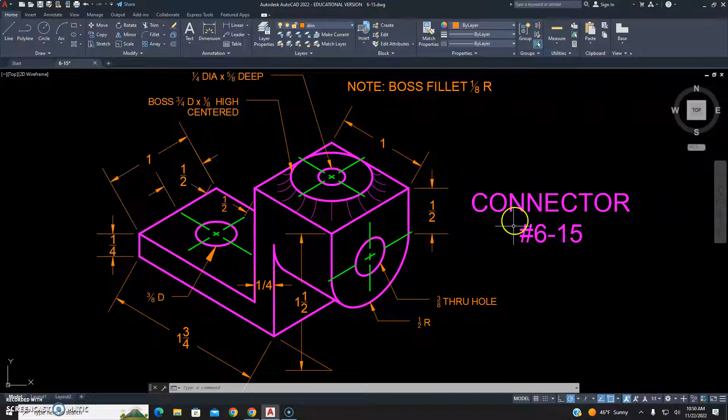So like I said, our front view is essentially going to be this view along this plane right here. So let's start with that. So we switch over to object. We said we have kind of an L shape that is 1 3/4 inch long by...

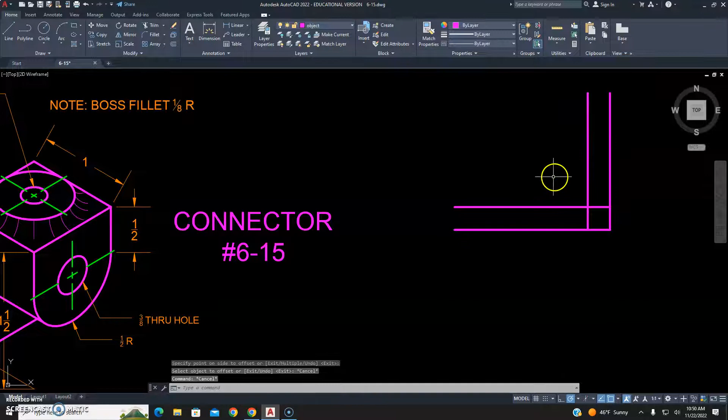1.5 tall. Now some of this line is going to have to go away eventually, but for now let's just get that L shape going. We said it was 1/4 inch thick. And we'll just connect up these lines here.

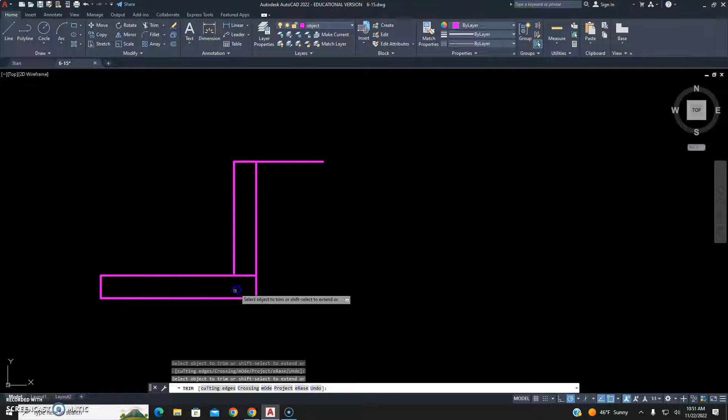And then what you could do to help yourself out here is draw this line 1 inch long—that's going to be the top. And then we'll come in and trim away these pieces. So here's our L. And again, we're not going to extend to the right past the end of this line because this completed is 1 inch. And some of this line right here is going to go away eventually, but we don't know what yet.

So next thing we need to lay out is our side profile of this letter D. This gets a little tricky because, from the side—if we remember—the side view of a cylinder is actually a rectangle. So there's no curvature in the view that we're going to look at here.

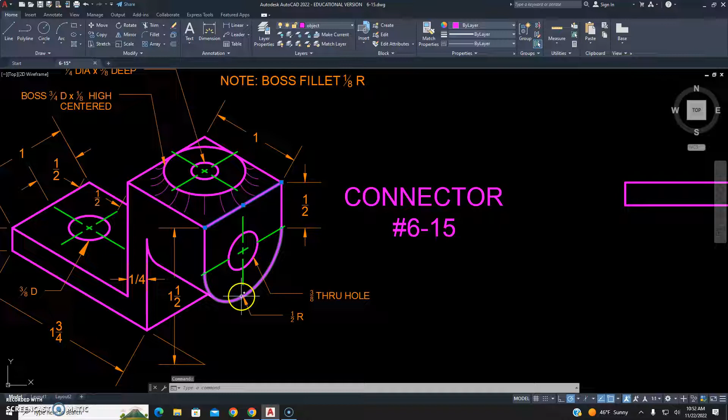So what we need to do is figure out the total height, and then figure out where things come into play. So here we've got a 1/2 inch radius that shares the same center point as this hole, so that means to get to the center of this is 1/2 inch from the bottom. And then if we go over here, we see a vertical measurement that's also 1/2 inch for the rectangular section, so from this edge to the bottom of our curve here is 1 inch.

So what we can do to make this happen is we're going to come down here 1 inch, and then come in and bring that into touch.

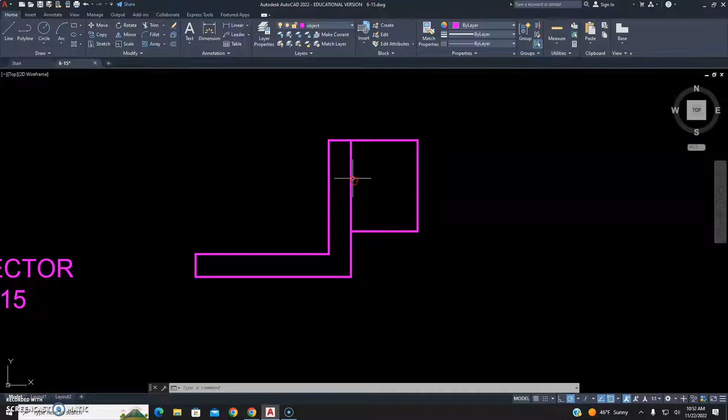Now, again, one thing we need to look at is go back and look at some of our original geometry. I can move my cursor along this flat face here and move it out onto our protrusion on the right without crossing a sharp edge. However, in our drawing currently, we do have that sharp edge. So we need to figure out where does this merge happen, and then where does it separate, because it actually separates when the front face starts to curve away.

So we need to find out exactly where this point is, that's exactly where our curve stops. Okay, so again we have a rectangular section up here. That's what's going to be coplanar with the side of this right here.

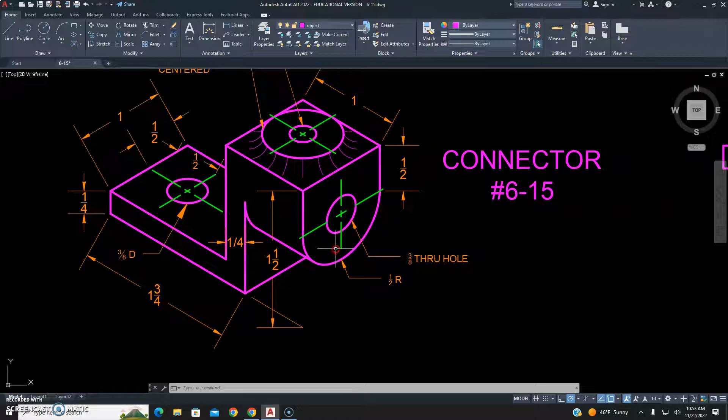And then the part that starts to sort of peel off is where the curve starts. So that's 1/2 inch down from the top. So if I offset down from the top 1/2 inch...

Okay, now I can either trim that or I could just shorten this line, doesn't really matter. And we'll delete that, and now the basic structure of this is essentially done.

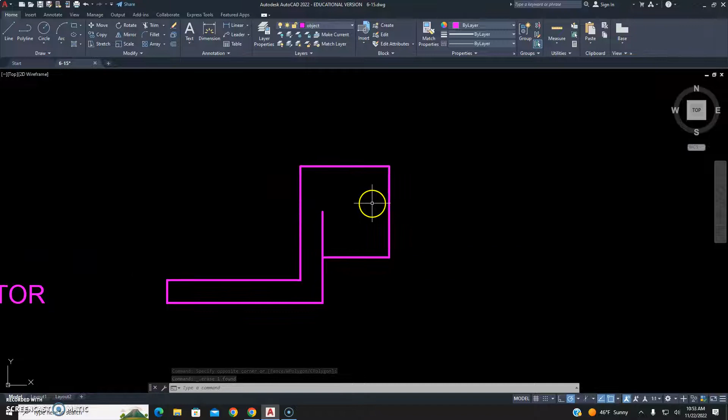Now we've got to add our boss, so we can offset that. Our boss fillet - our boss is 1/8 of an inch tall and 3/4 of an inch wide. So offset 1/8 of an inch.

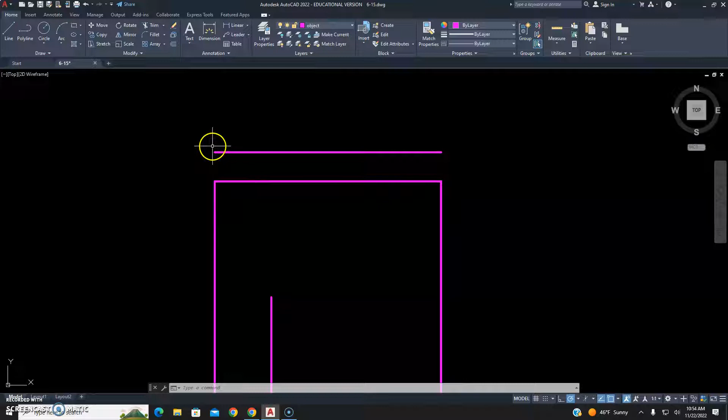Now there's two ways we can do this side profile of the boss. One is we could shrink this line down that's currently 1 inch long and turn it into a 3/4 inch line, and then add the fillet after the fact, because it has a fillet of 1/8 of an inch as well. Or if we realize we have 1 inch total in width here, and then we have a 3/4 inch flat surface, and then we're adding an 1/8 of an inch fillet to each side, which means we're going to have kind of this rounded curve.

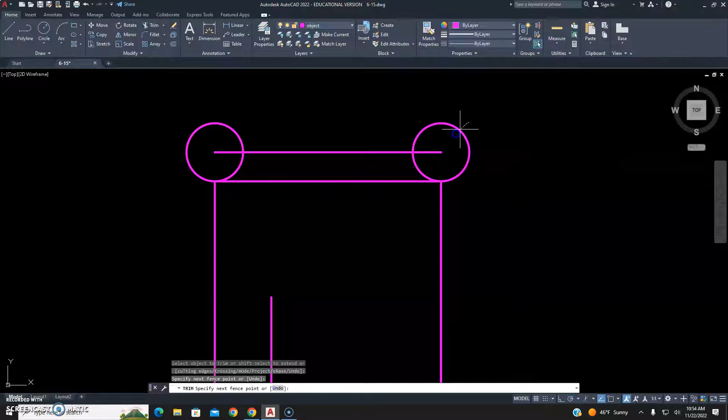It's going to come right to the edge. So a neat little trick is to just draw a circle here rather than use the fillet tool, like so, and then trim this up. Watch this: 1, 2, 3, and 4. And there we have 3/4 of an inch, our boss, plus our fillet, all set there.

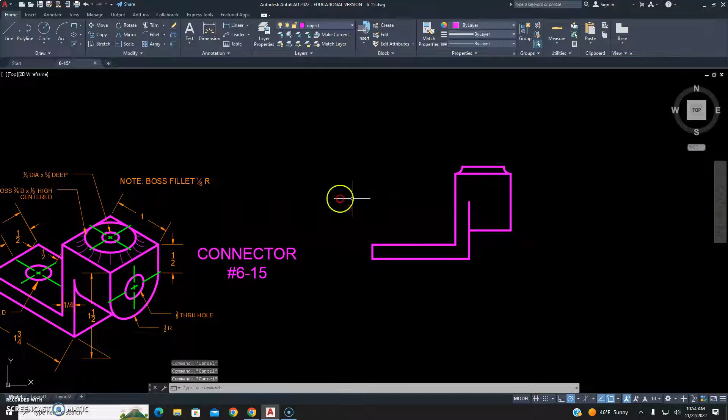So now essentially all of our visible lines are done in this view. Now we can start adding in our holes. On the back side, we have a hole that comes 1/2 inch from the left edge of our drawing, and it is 3/8 of an inch in diameter, and that 1/2 inch goes right to the center of the hole. So if we offset here 1/2 inch...

Okay, a few things we could do to lay this out. Number one, we could offset this 3/16 in either direction, or some people might appreciate this: draw a circle right there, hit D for diameter and type in 3/8. Then we can just use that as a temporary marker to bring in our hidden lines here.

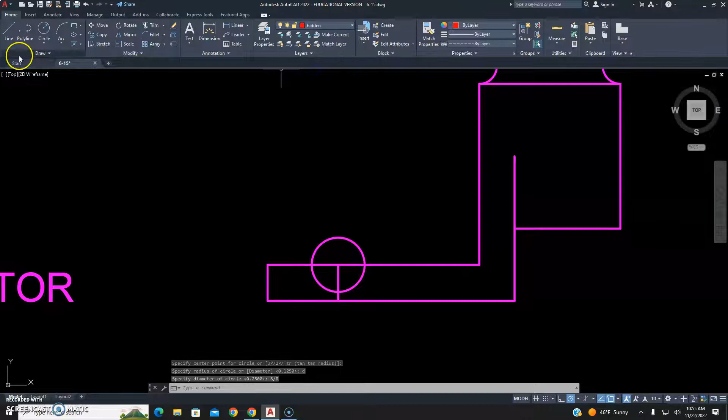Get rid of that circle. This is going to become a center line, and we need to stretch it out, obviously. So let's go 0.1, and then down 0.1 as well.

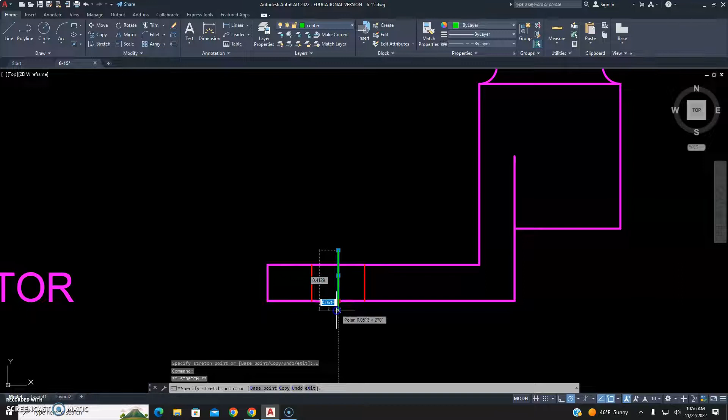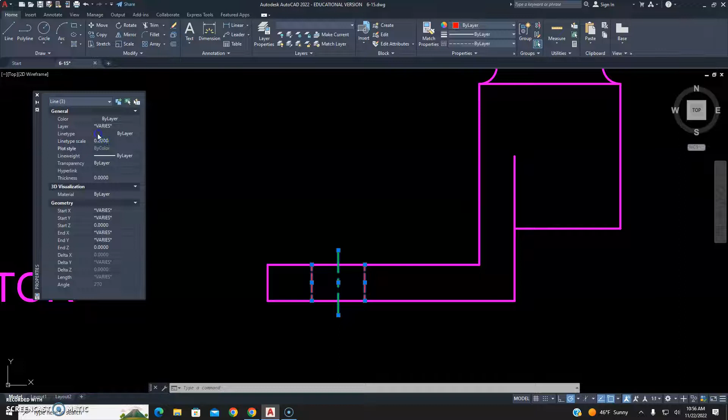And we got to adjust the line type scale on these. So let's bring that up - let's go 0.5, see where that leaves us. It looks like we don't have a line or a dash with our center line yet, so we're going to go 0.3. Okay, let's try 0.2 - there we go. I like that, that looks good.

Alright, and then we have two more holes. We have a vertical hole - if we look at the call out on that, it says it's a 1/4 inch diameter by 5/8 of an inch deep. But let's draw the horizontal hole first.

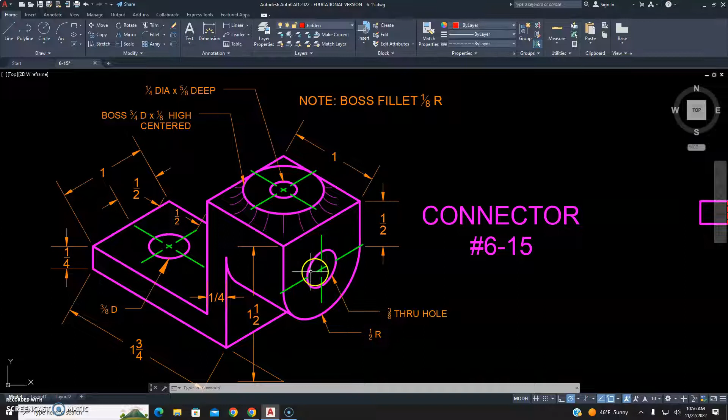Our 3/8 through hole that's centered up on the circle, so that's going to be centered up right through the middle of this anyway. So let's take and draw a center line right through the middle, just find our midpoint here and draw that across. And we said it's 3/8, so we can offset 3/16 this time.

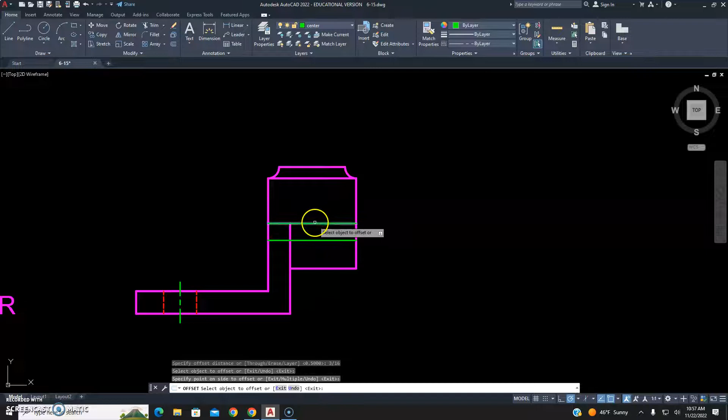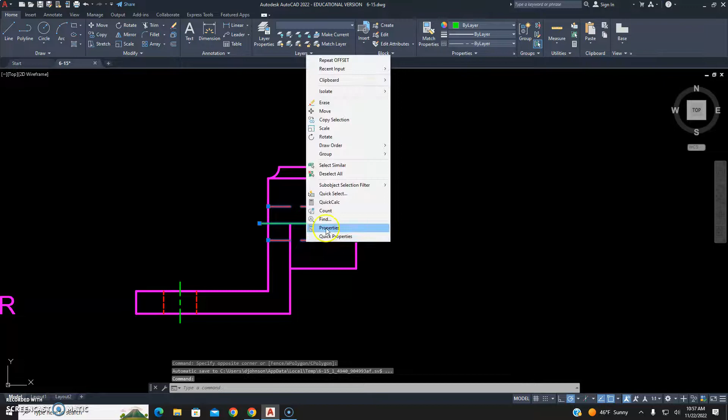Or you could do the same thing we did last time, where we draw a circle on the end and then use that to guide our geometry - it's up to you. Switch those over to hidden, and then of course we're going to stretch out our center line. Let's go 0.1, and 0.1 as well. And then let's decrease our line type scale for these as well - let's try 0.5, that gets us exactly what we need there. It's looking good.

Now our hole that's going to go here is right in the middle, so we can at least temporarily draw a center line. We said it's 5/8 of an inch deep from the top surface, so if we offset that down 5/8, you'll see it lines up right with our center line here.

So we can just delete that. Actually, let's hit Control Z and bring that back. So this is the termination point of our hole. So technically, we could...

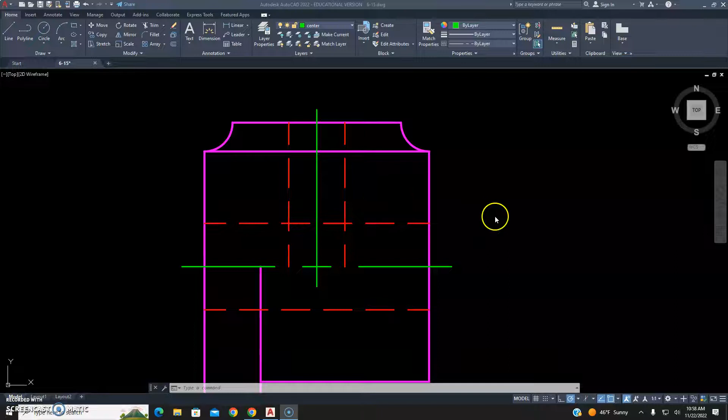Offset 1/8 of an inch, one left, one right. Then we'll come in with our trim tool and just remove that and that. And then we'll turn these two into hidden lines. In fact, we could just use match properties, use this as our source, and then use it to draw these two into hidden lines. Now, temporarily, this is good enough, other than adjusting the line type scale there.

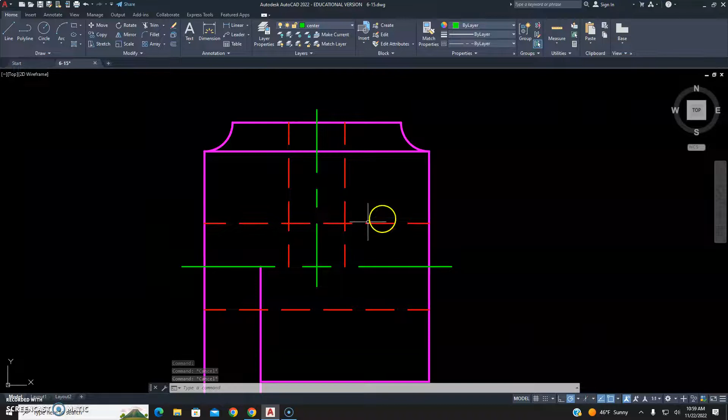However, we can better define that vertical hole there by adjusting the termination point of it, where it's actually going to have a bit of a curve to it. But we can't do that until our right side view is done. So let's start drawing this view.

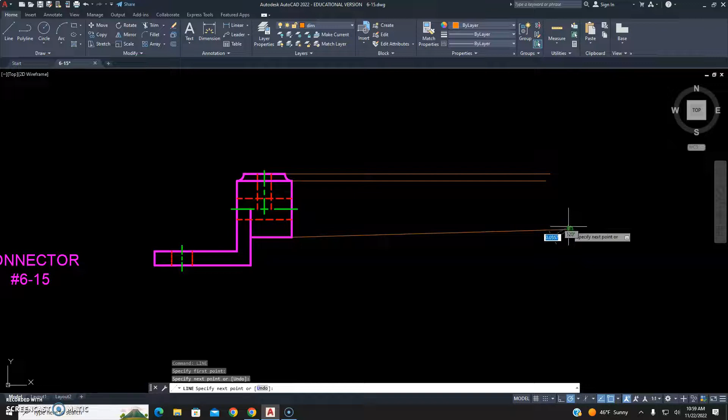We'll always start by just using our construction lines to project across. Again, any sharp edge or corner. Because we have a round feature on the top, we're actually going to be able to just copy that directly, which is sort of nice. Oops, didn't want to do that. There we go.

Let's bring the middle of this hole across too while we're at it. And the bottom. And let's bring this over as well. I know it looks like a lot, but this will just really help streamline things for us.

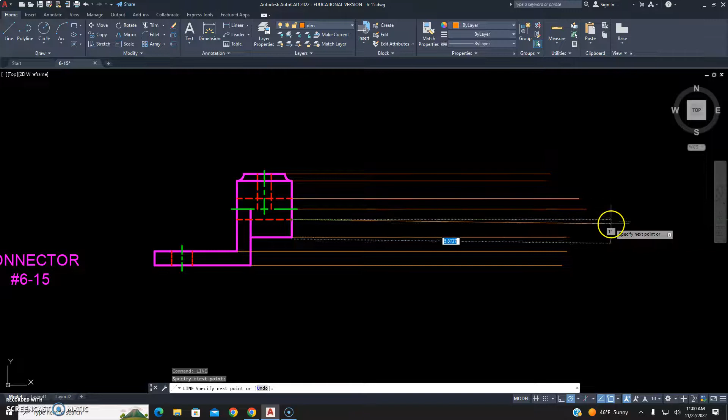Okay, so let's start real simply. We're just going to start by just copying the top piece here. And we'll just bring it straight over. There we go.

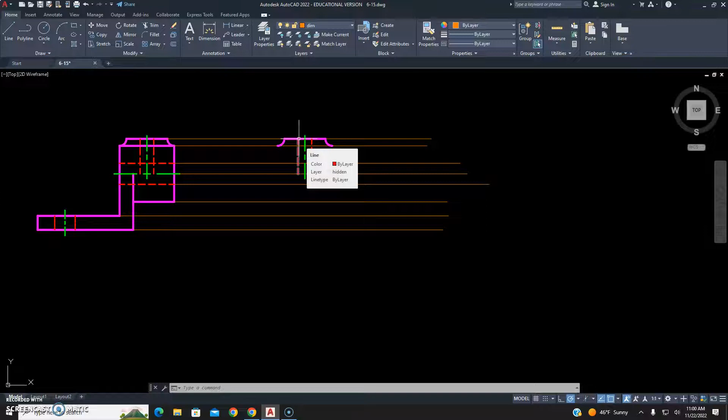And again, that's because both of these features, the hole and the boss, are cylindrical. And we're looking at what's essentially a side view of them. So no matter what direction you look at from this plane, it's going to look the same.

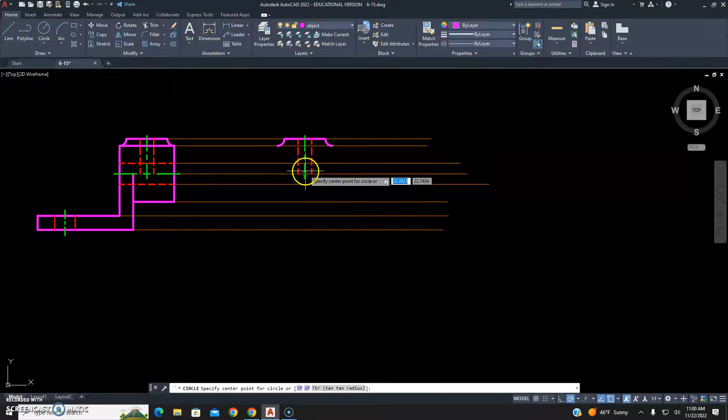And then here we've got a hole that's centered up, so we can come in with our object line. We can come in and bring in our two circles here, one there and one here. Okay, then we'll finish drawing in this face. It's going to go there.

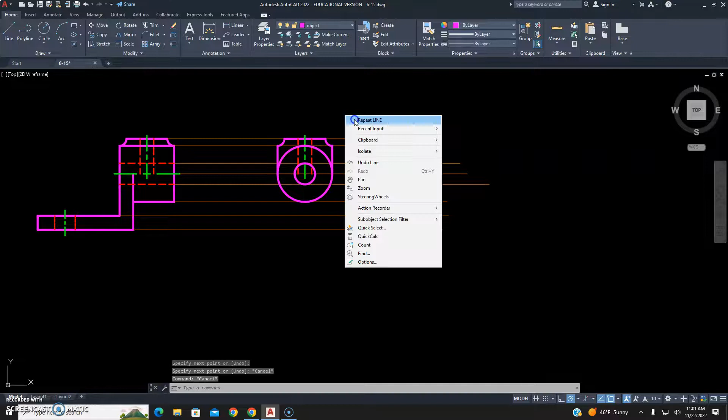Again, we want it to kind of look like a letter D that's sort of turned 90 degrees, and we're going to bring this sharp edge across as well. And so now all I have to do is come in with the trim tool here, and we can remove the bottom half of this circle, which is a bit of work, but it's okay. Not too bad. There we go.

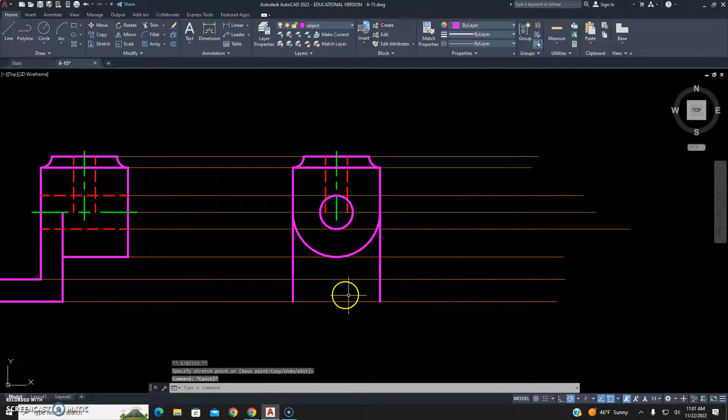And then these lines, these vertical lines, we can actually carry those down all the way to the bottom. We're just stretching those out, and then we'll put in a line here. And then we just need a hidden line across the bottom to show that little back tab.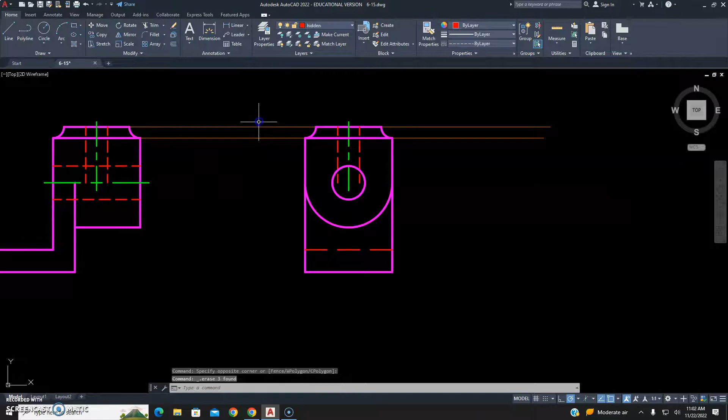Okay, so we are done with this construction line, this one, all the ones for the hole, and the top. So we're done with all of our construction lines. We just need two more features here.

One is this hole, which we can just copy directly. So we'll just grab that, we'll click copy, and bring that across. Now, because these do touch, we want to make sure that the line type scale of this horizontal hidden line...

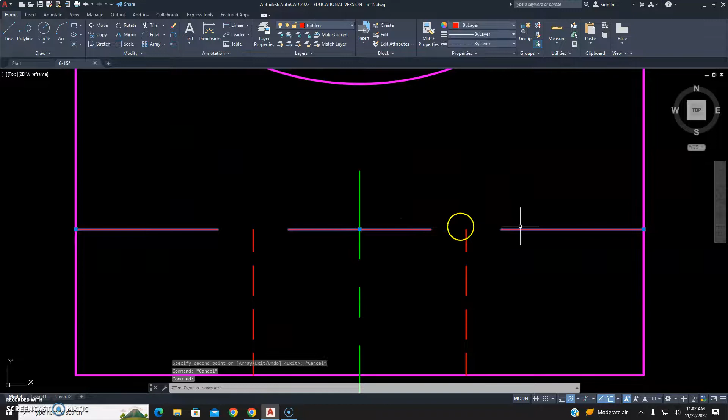makes it so that there's a section of the line, not a gap in the hidden line. So we got to adjust that down. So let's try 0.5. Doesn't work. We need more. Again, we don't want a gap in that top line. We want to touch there. So let's do 0.3.

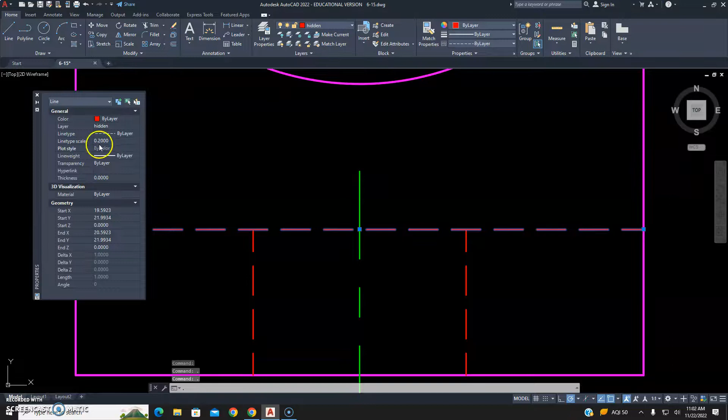Let's try 0.2. I think it might work better. There we go. That's exactly what we're looking for there. That helps out a lot.

And then the last thing we need are just center lines here. So we can just offset. Let's try 0.1. Go out. We'll draw in our center lines and we'll adjust them.

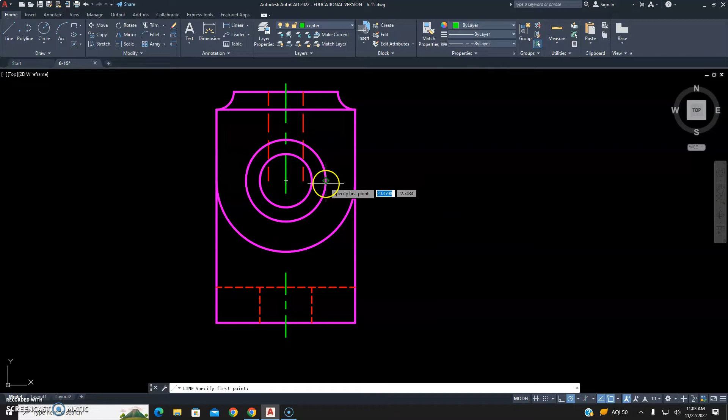And it looks like we're coming up on needing a part 2 for this video. And we're going to bring this center line down, which will create it so that we don't necessarily have a plus, but that's okay. We'll adjust that. And we will adjust our line type scale for this one, last but not least.